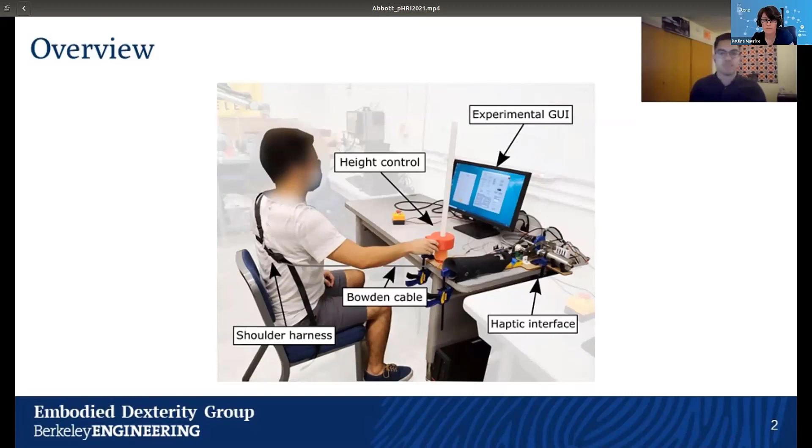Body-powered devices for grasp assistance. Through human subject testing performed using an experimental haptic testbed, we found that the addition of kinesthetic feedback led to improved grasp force control in a virtual grasp and lift task. By applying force to the user's contralateral shoulder related to the magnitude of applied forces in a virtual environment, participants applied lower and more consistent grasp forces using an upper limb prosthesis emulator. These results show the potential for such feedback to allow users finer control over their assistive devices.

Body-powered devices link the motion and force of a functional limb to that of some end effector through a passive cable system. While this cable can result in high loads applied to the user's body, it also enables the transmission of kinesthetic information back to the user regarding the state of the terminal device. This topology has been shown to exhibit superior feed-forward and feedback information rates when compared to other control mappings or user intent detection methods.

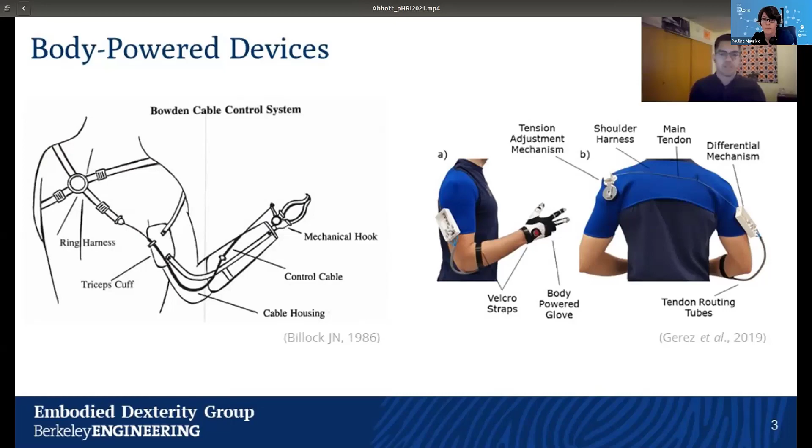This work examines the isolated role of this feedback on users' grasp force control in a study of body-powered prostheses. To do so, we designed a haptic testbed to emulate the operation of a body-powered prosthesis and allow for the systematic variation of force feedback presented to the user. In a virtual grasping environment, participants control the aperture of a gripper through motion of their shoulder, pushing and pulling on a harness and cable system, whose travel is measured as rotation of a motor shaft by an attached encoder.

Energizing the coils of this motor produces a force on the user's shoulder through the same harness. A custom cable transmission converts between the rotary motion of the motor and linear motion of the control cable, along with a tension sensor to control the output force feedback. Participants raise and lower the virtual gripper with a controller comprised of a 3D printed grip, Teflon tube, and an infrared distance sensor.

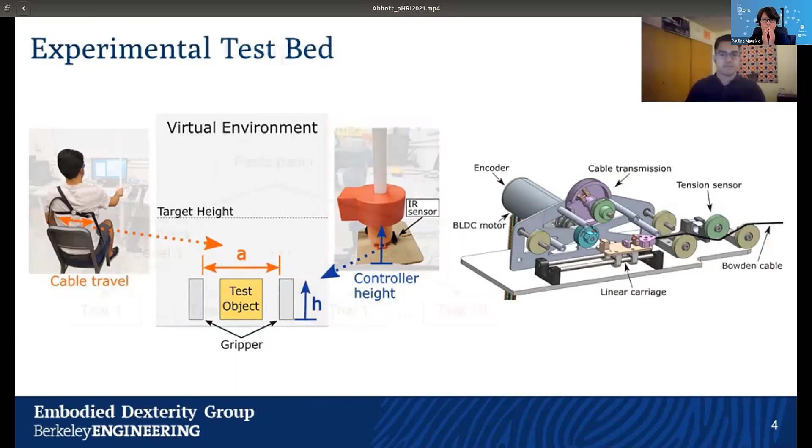For human subject testing, each participant experienced 5 separate feedback levels, ordered randomly, where the feedback level determines the scaling between virtual grasp forces and physical feedback forces. Participants performed 10 grasping trials at each feedback level, for a total of 50 trials per participant. The following analysis was performed on data collected from 9 participants.

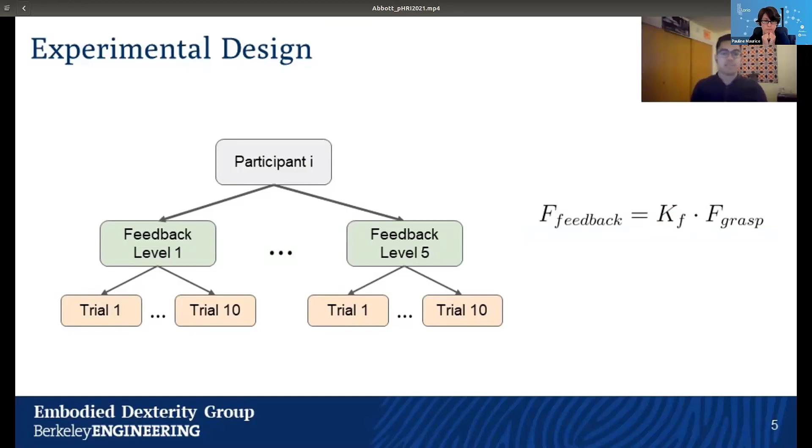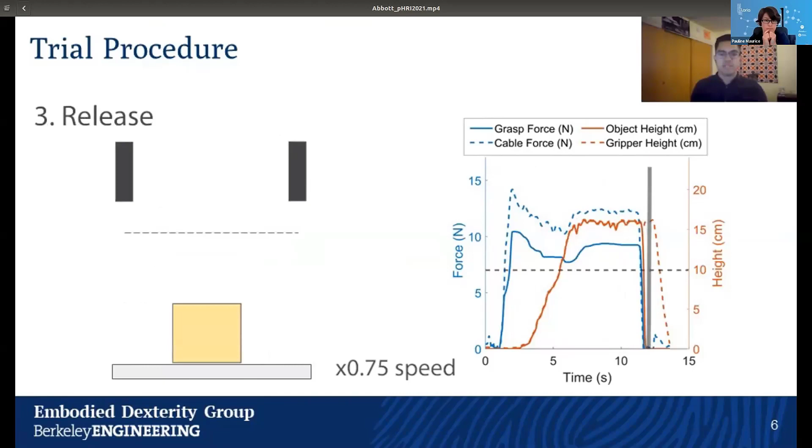Each grasping trial consisted of 3 stages. First, participants closed the grippers on the test object using the shoulder harness and grasped the object. Second, they lifted the object a minimum of 15 centimeters using the height controller and held the object for at least 5 seconds. Third, they released the object using the shoulder harness and let the object fall back to the ground level. In analyzing participant grasping behavior, we find that mean grasp force while holding the test object significantly decreased with increasing force feedback.

Participants applied less than half the force at the maximum feedback condition compared to the no feedback condition. Furthermore, the trend appears to be nonlinear with diminishing returns as the decrease in grasp force lessens between the higher levels of feedback. Similar trends, both in terms of shape and magnitude, are observed in analysis of peak grasp force as well as grasp force variation during the holding phase.

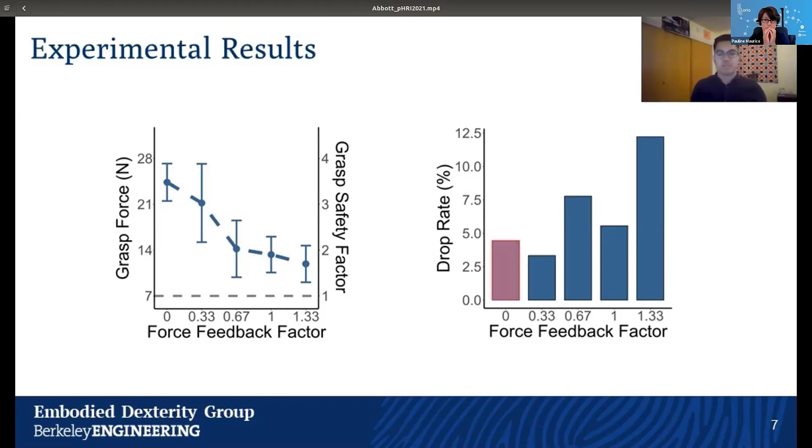However, participants also dropped the test object more frequently with higher levels of feedback, increasing from 4% at no feedback to 12% at maximum feedback. Taken together, these results demonstrate how the presence of force feedback can produce improved grasp force control in users.

The high loads exerted at high force feedback factors typically resulted in the best grasp performance, but also left users more prone to drops, as well as potentially exposing them to fatigue over long-term use. Additionally, the diminishing returns seen in the results also indicate that lower forces could produce comparable benefits to grasp performance in assistive devices without the added weight or space of more powerful actuators or higher reduction transmissions.

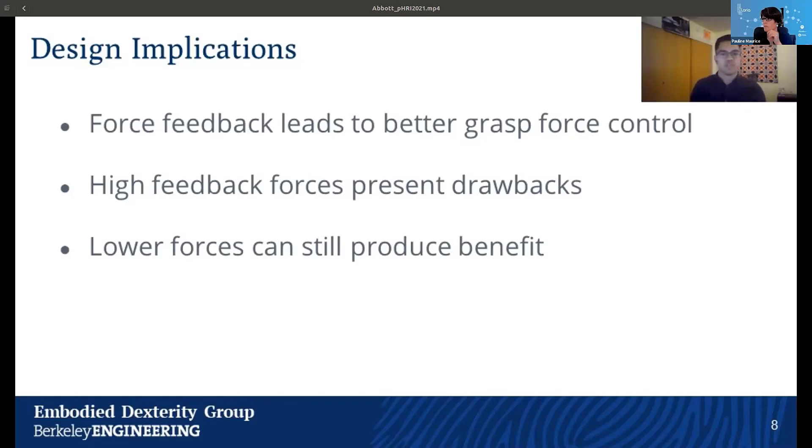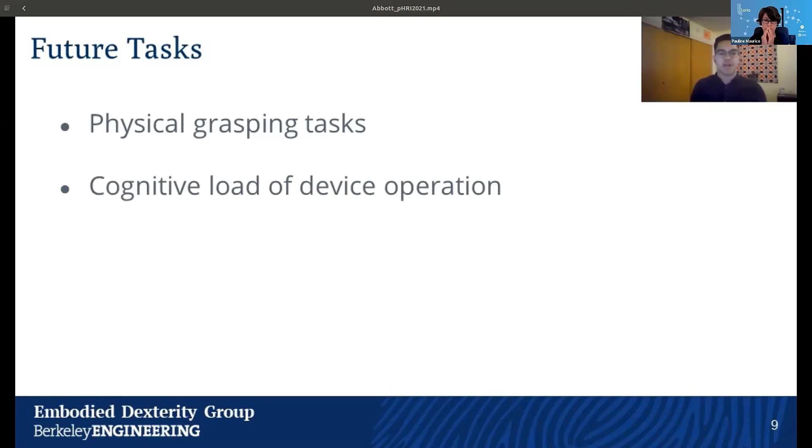We look to extend these findings through several potential paths. First, we aim to observe how kinesthetic feedback interacts with weight sensation in a physical grasping environment. Second, we will study the effect of kinesthetic feedback on the cognitive load placed on the user during device operation. Finally, we will investigate the integration of cable-based haptic interfaces into novel hybrid devices, which combine passive and active components, both for prosthetic technologies and those which work in parallel with intact limbs.

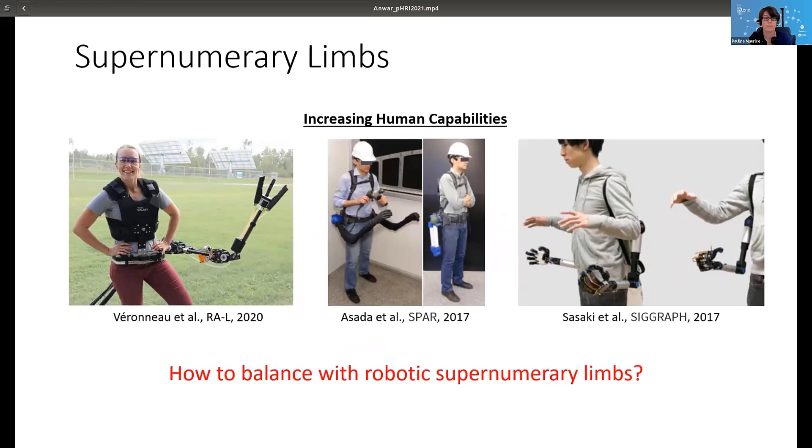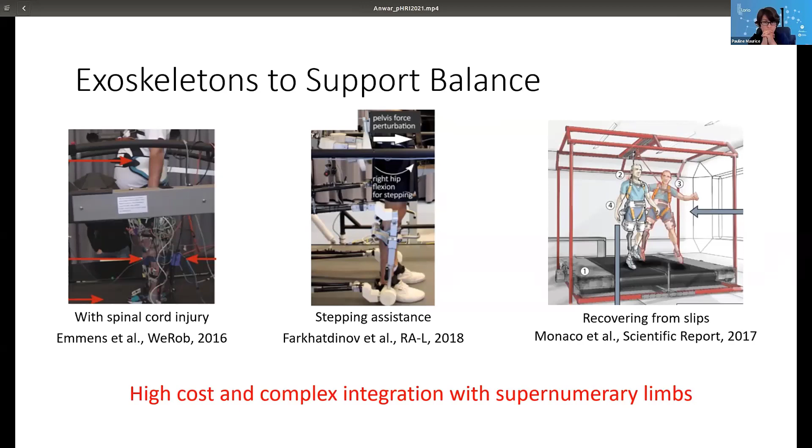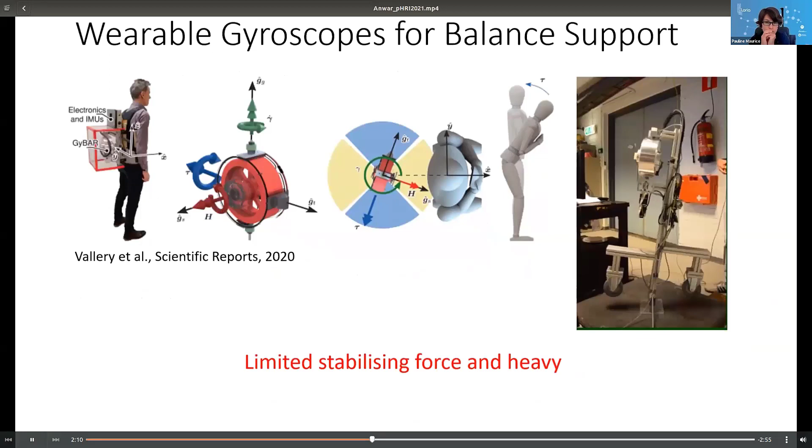Our goal is to use supernumerary limbs for material handling. We will make use of a robotic tail for balancing. We want to improve ergonomics and posture support for people using the system. Next, I'll talk about the simulation study that we conducted.

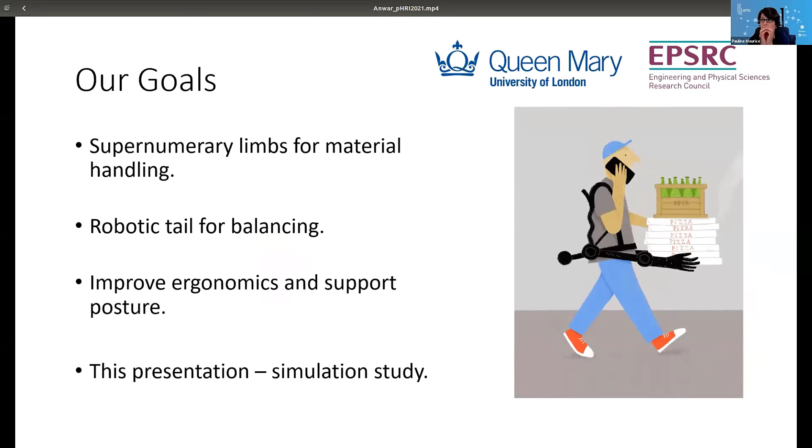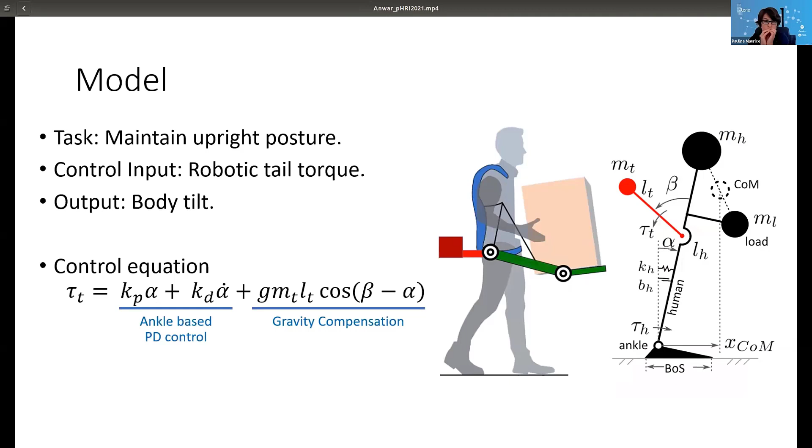We created a simulation model, and its task is to maintain upright posture. The control input is torque for the robotic tail, and the output is the anterior-posterior body sway. The human is modeled as a blue bar, and the load they're carrying is the orange box. The load is 10 kilograms, and its center of mass is 25 centimeters in front of the human center of mass. Due to gravity, when there's no stabilization, the human falls forwards, as shown in this video.

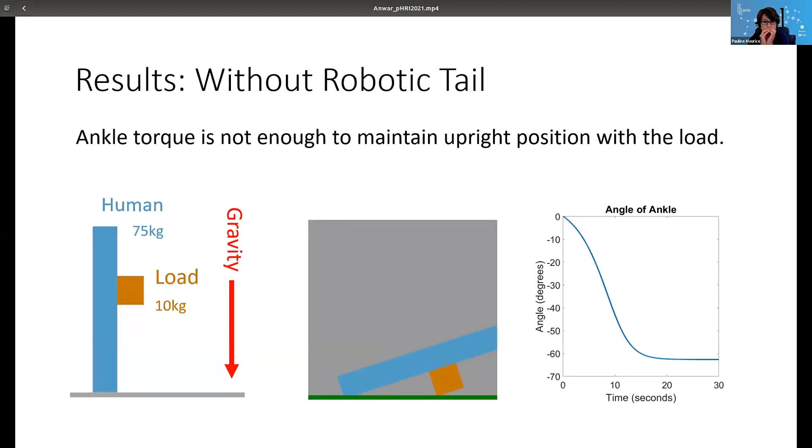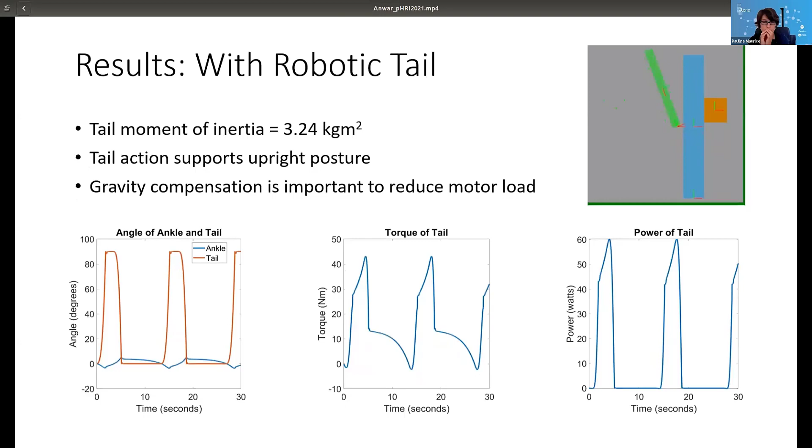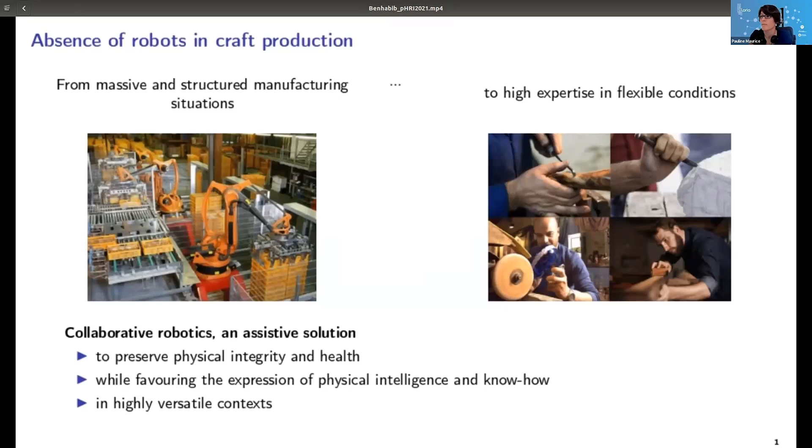Carpentry and the wood shaping task seems to bring together the problems mentioned. A wood shaper is a machining tool used to profile wooden parts. During the shaping process, the carpenter machines a piece of wood in strong interaction with a cutting tool.

However, the wood is a non-homogeneous and anisotropic material. This can lead to strong instantaneous variation of the cutting forces and destabilize the part throughout the task. This is characterized by a large variation in the workpiece velocity that the operator cannot compensate. According to our partners from the Carpentry Teaching Center, this is the origin of most tragic accidents in wood shaping and explains why many carpenters have lost phalanges.

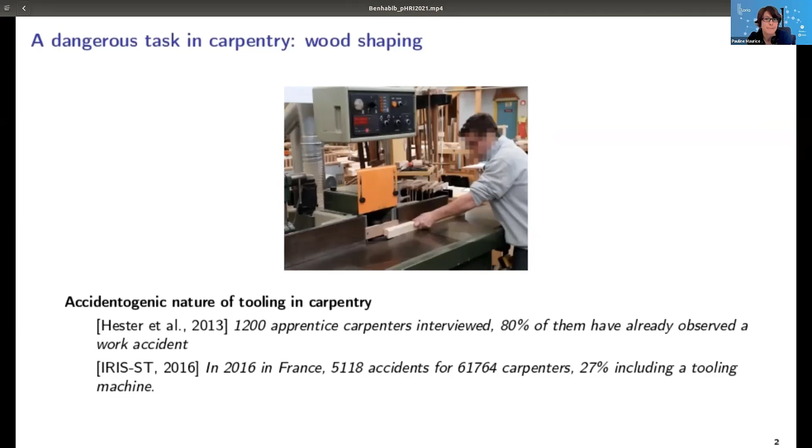In addition, wood shaping appears to be an arduous task given the posture adopted during the operation. Given the expertise required by wood shaping and its highly dangerous nature, we chose this task as a pilot to investigate the potential of collaborative robots in the craft context. The collaborative robot may be a good solution to stabilize the wooden part during tooling.

A proper approach to evaluate this hypothesis requires analyzing the various conditions of accidents and testing design choices, both in terms of robotic architectures and controllers. However, prototyping a direct solution in real conditions is dangerous and ethically complex. So, at first, it appears necessary to resort to a process simulator.

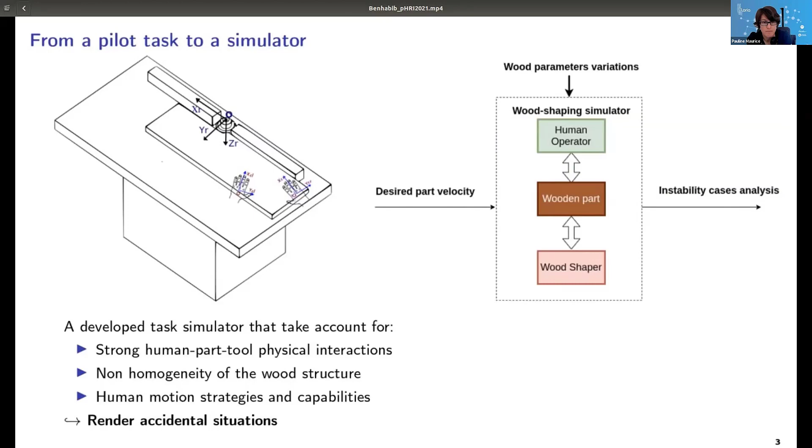To provide useful and meaningful information, we developed a physics-based simulator in order to reflect the wooden part dynamics as a function of its interactions with the tool and the operator. The simulator also allowed us to render the varying cutting conditions due to the non-homogeneity of the wood structure. Finally, it takes into account human action and its biomechanical limitations.

Given the nature of the fast velocity variation observed, a rather straightforward assistance strategy is proposed. The robotic assistance provided to the user should aim at decreasing the risk of sudden modification of the velocity while allowing the carpenter to maintain direct physical interaction with the wood, as well as his sensations.

To do so, we consider an assistance architecture where a collaborative robot is attached to the wooden part and applies appropriate wrenches to it in case of disturbance. To meet the specifications, it is proposed to use the robotic system in order to damp the transient velocity change when an instability occurs. The robot-controlled torque is thus computed to compensate gravity while applying a damping wrench.

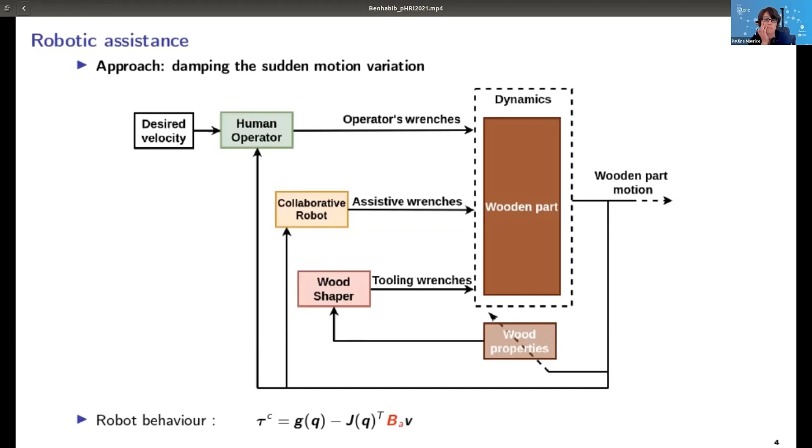The obtained results are now presented. In the proposed video, we illustrate the effect of the damping coefficient on the velocity peak when the disturbance occurs, both in simulation and experimentation. In the top left quadrant, we can see the subject performing the proposed experiment.

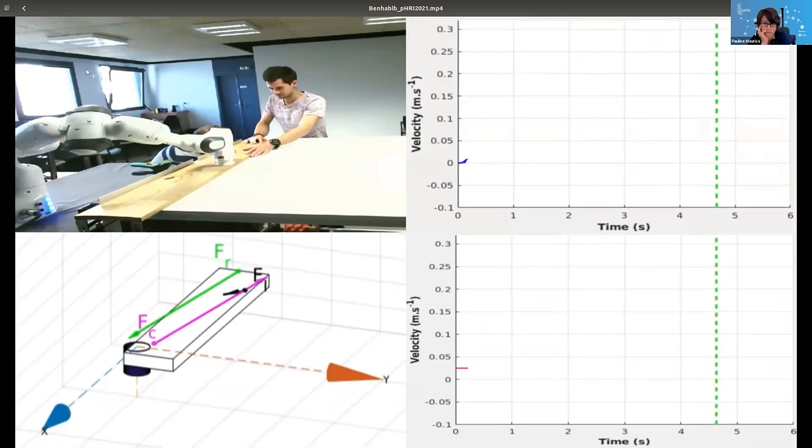In the quadrant below, a visualization of the corresponding simulated motion of the wooden part and associated interaction forces is proposed. The evolution of the velocity of the wooden part is shown on the right side. The top right quadrant corresponds to the experimental results, while the quadrant below corresponds to the simulated ones.

One can observe that the damping added by the robot provides an effective way of reducing the velocity peak, in terms of reduction of the forward motion of the hands induced by the wood disturbance. As expected, the larger the damping value, the more efficient the reduction of the peak velocity is. Very interestingly also, the simulated and experimental results are quantitatively very similar.

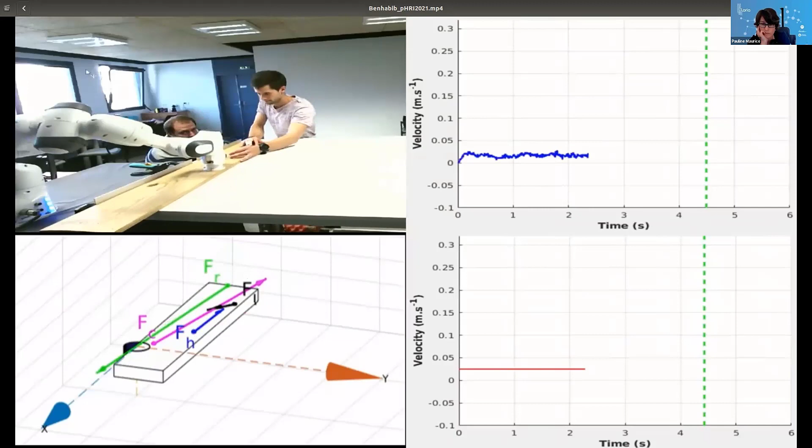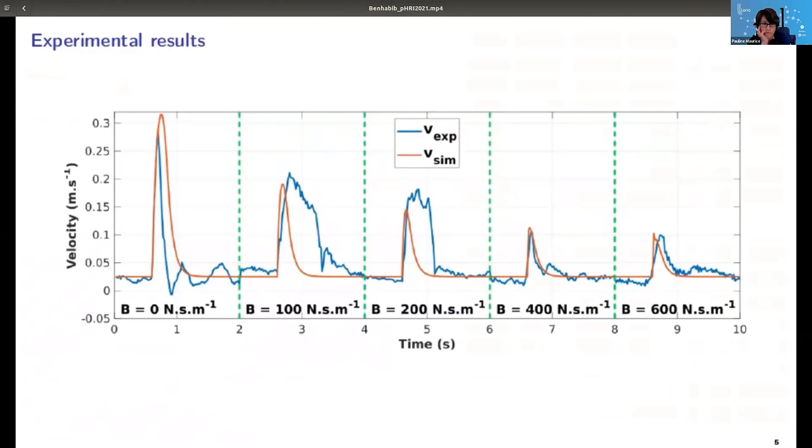In this video, I have presented our work, which is a first step towards a design methodology for the use of collaborative robots in the craft domain. Focusing on a wood shaping pilot task, we have developed a physics simulation of this process. This simulator allows us to predict the dynamic behavior of the wood part being milled as a function of the mechanical properties of the wood, but also accounting for the biomechanical capabilities of a simulated human operator.

The simulator appears to provide realistic estimates of the process behaviors and could be used in preliminary design phases to make choices in terms of robot architecture and control. However, the question of the trade-off between task safety, quality of execution, and operator comfort remains open. We believe that this issue can be addressed by adapting advanced control architectures to the expertise level of the operator. This then requires specifying and quantifying the operator's expectations in terms of sensory motor control on the task and its temporal evolution.

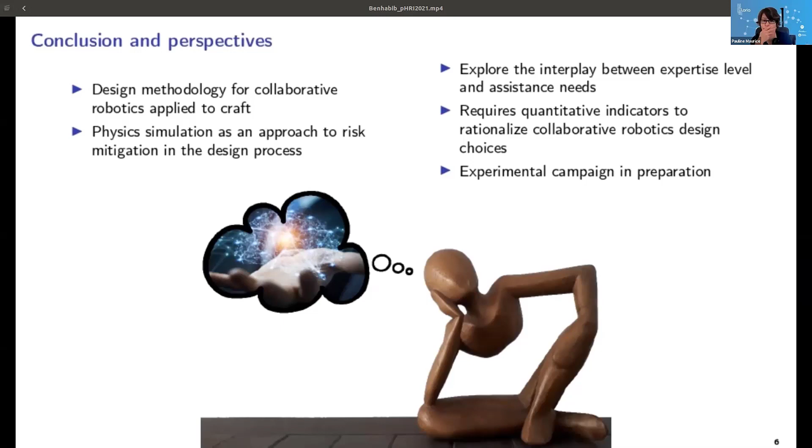Hello, my name is Thomas. I'm a PhD student from the University of Leuven in Belgium, and in this short video I will introduce the controller for a quasi-passive hip exoskeleton.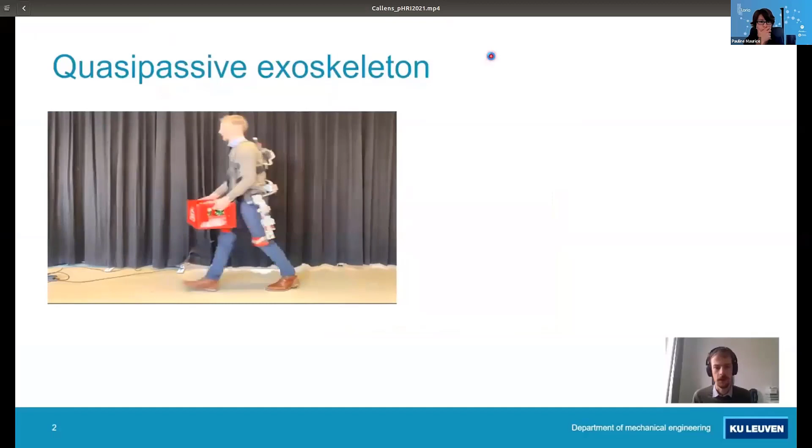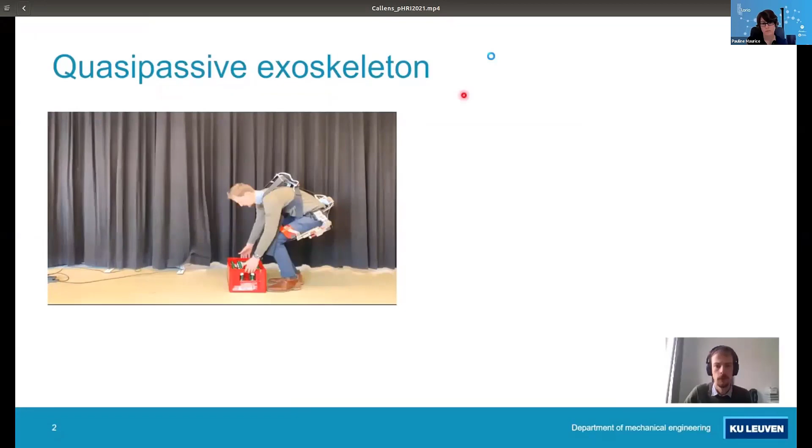Before introducing the controller itself, let's first take a look at the exoskeleton at hand, which has been developed by our colleagues from the University of Brussels. In the video on the left, I'm wearing the exoskeleton. The exoskeleton provides support whenever you're lifting objects from the ground. It contains two modules: a passive back module as well as a quasi-passive hip module. The quasi-passive hip module contains a parallel spring mechanism that can be coupled or decoupled.

In the figure on the right, we show the mechanism or solenoid responsible for the coupling or decoupling. As soon as the solenoid is engaged, a user will start to feel support when flexing forward. Apart from the solenoid, the exoskeleton also contains encoders, one located on each of the hip joints, such that we can register the hip flexion angles.

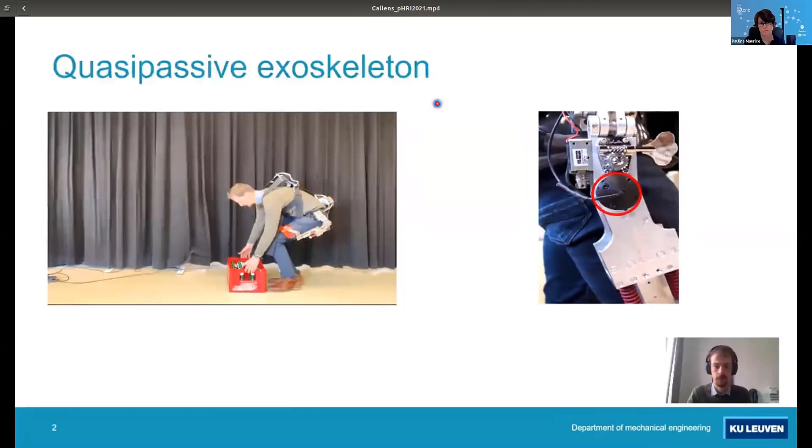The controller for this exoskeleton thus needs to decide whether to engage the support mechanism in the hips or do nothing. Our approach is to use higher order knowledge about the motions being executed, such that we can then make smart decisions on whether to engage the support mechanism or not. And we do this using decision theory.

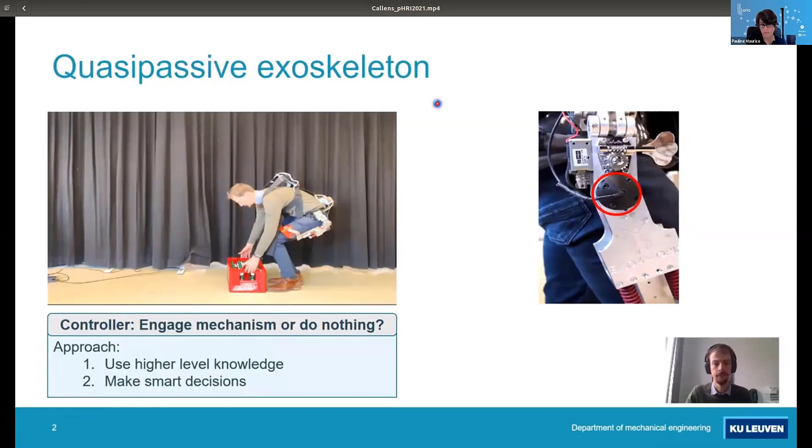To be able to use higher order knowledge about the motions being executed, the exoskeleton needs to have access to a database of known motions. To create this database, I've recorded myself while performing different types of motions, using the sensors on the exoskeleton to record myself. I've performed squat motions, asymmetric stoop left motions, and asymmetric stoop right motions.

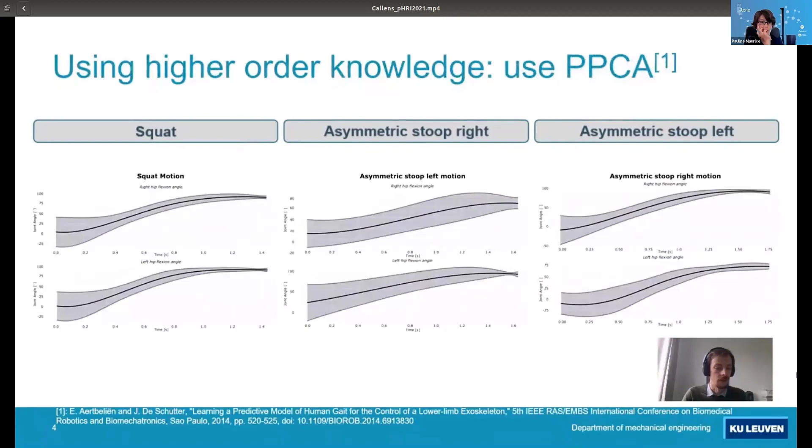Next, using a technique called PPCA, or probabilistic principal component analysis, I've transformed these demonstrations into motion models. The black line in the figures is the mean of the demonstrations, while the gray area indicates the variance in the demonstrations. The exoskeleton then uses these motion models in the database to detect ongoing motions, as well as calculate the probability of ongoing motions.

Once the exoskeleton has recognized the motion, it now needs to make a decision about whether to engage the support mechanism or not. To do this, we use decision theory. This means that we will first think of the actions that the controller can make, as well as the outcomes or situations that we can end up with.

The first action that the controller can do is to engage the support mechanism. There are two possible situations that we can end up in. The first situation is the one in which the user is getting the support that he or she wants—this is a positive situation. The second outcome is the one in which the user did not want support but is getting it anyway. In this situation, the exoskeleton is hindering the user.

To both of these situations, we now assign a utility or usefulness score. The green one is a positive score for a positive situation; the red one is a negative score for a negative situation. Similar reasoning has to be done for all the actions that the controller can do. In this situation, there is only one other action that our controller can do, which is doing nothing.

Then for each of these actions, we can calculate the expected utility. The expected utility starts from the utility scores for all the situations and weighs them with the probability of ending up in such a situation. These probabilities follow from the motion models that we have introduced earlier. The controller will now take the action that maximizes the expected utility, such that we always do best for our user.

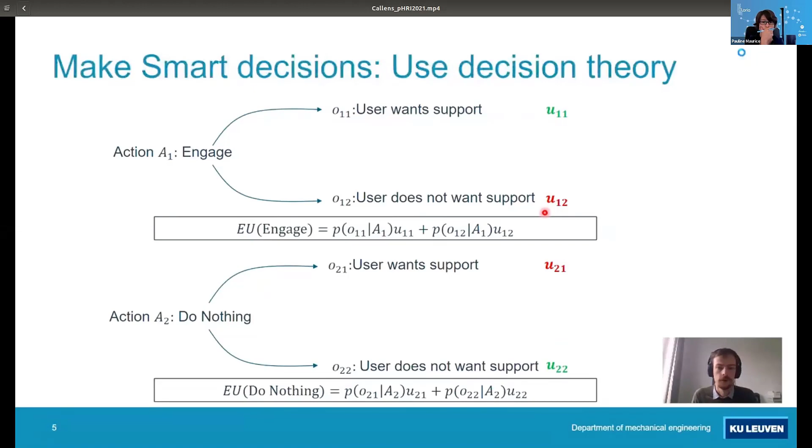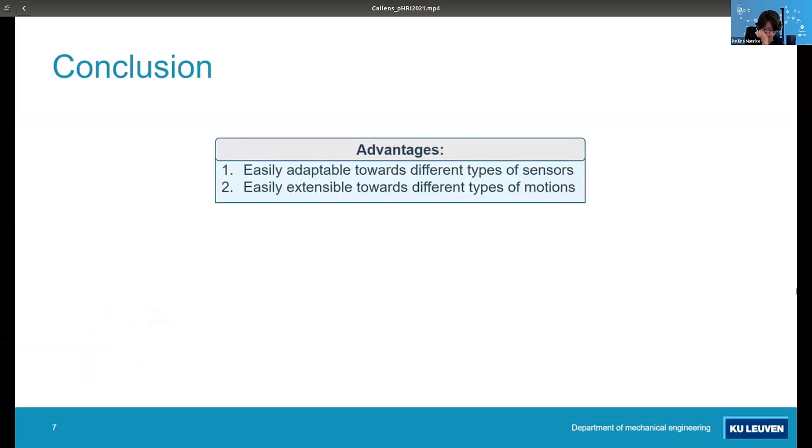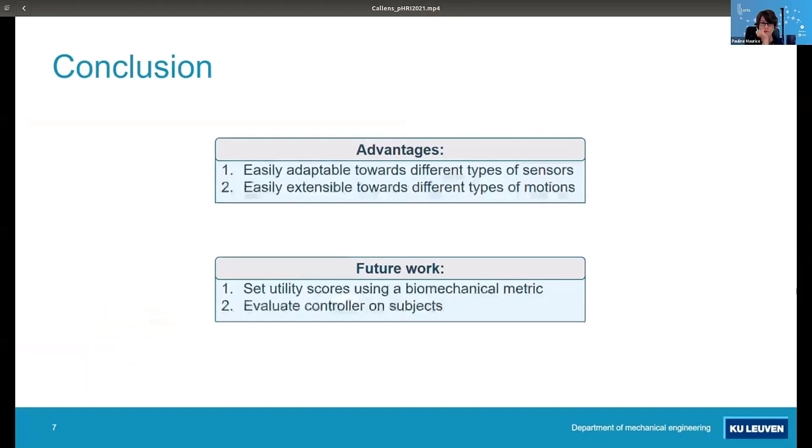The advantage of this approach is that it's easily adaptable towards different types of sensors, as well as easily extensible towards different types of motions. In future work, I will try to set the utility scores of the different outcomes using a biomechanical metric, and I'll also try to evaluate the controller on subjects. Thank you for your attention.

Working in a not suitable posture may cause many problems like work-related musculoskeletal disorders, the single largest category of work-related injuries, responsible for 30% of all workers' compensation costs. One way of improving workers' physical health and promoting industrial productivity is to do the job in the most ergonomic way possible.

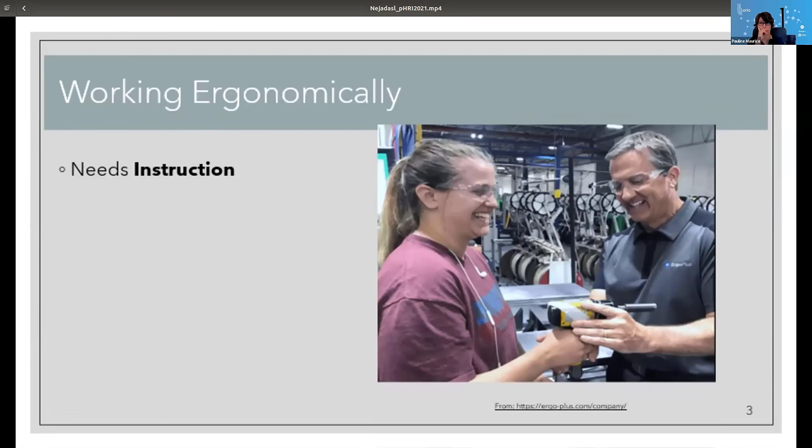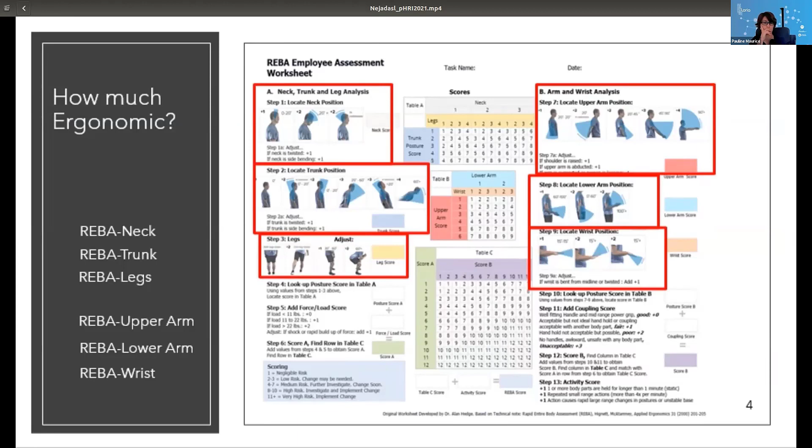In some cases it needs instruction, especially in industrial environments. Consider working - there is a systematic way that can quantitate the ergonomic state of the employee, the REBA assessment method, which assesses the worker's ergonomic situation in 6 steps and ensures that the joint degrees of neck, trunk, leg, upper arm, lower arm, and wrist are calculated. Finally, by using some tables, the final REBA score is obtained.

The main idea was first to give customized instruction to the user by a user interface, to remind the worker about its current posture and the most optimized posture that can be obtained.

As stated earlier, each posture has a REBA score, and each REBA score consists of a REBA array that holds the REBA score of each joint. There is an equivalent array of joint degrees holding the angle interval based on the REBA score. For example, for the neck, a joint angle between 20 and 60 has a REBA score of 2.

The optimization algorithm is based on getting the current posture joint degree and computing the REBA score. In case it's greater than a threshold, we're going to reduce it. But the question is how much reduction is possible.

First, consider the person's REBA score is 5, as an example. Reduce it by 1 unit - faced with many combinations of segment REBA scores that all result in a reduced REBA score of 4, and according to the REBA assessment method, they are ergonomically at the same degree. Choose one of these combinations and continue with that, proposed to the user.

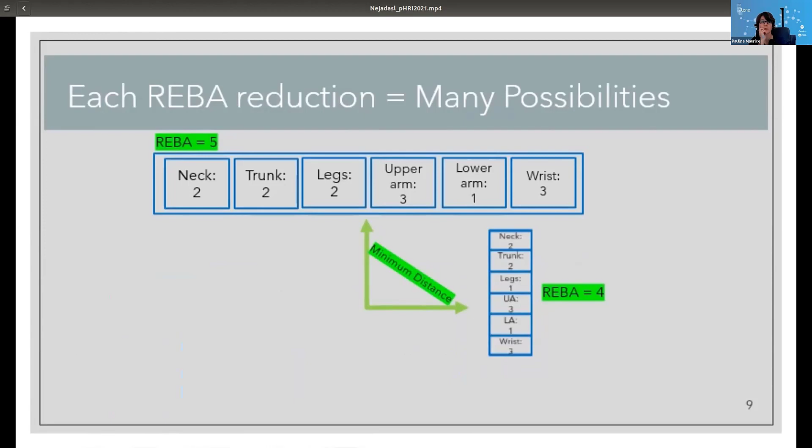We choose the one which has the minimum distance to the current posture, and the feasibility of this decision will be checked.

To check the feasibility, we should know that each selected REBA array specifies the human joints - the wrist, elbow - that the human joint should move within this new constraint. This will result in a new movement limitation to the user. The question that arises here is, can the person also continue to do the job under these new constraints or not?

So to choose, select, and check the feasibility of the selected decision, we go for the inverse kinematic FABRIK. FABRIK is a forward and backward reaching inverse kinematic, and it solves for a target position - in these new joint constraints, it can determine whether the target can be reached or not.

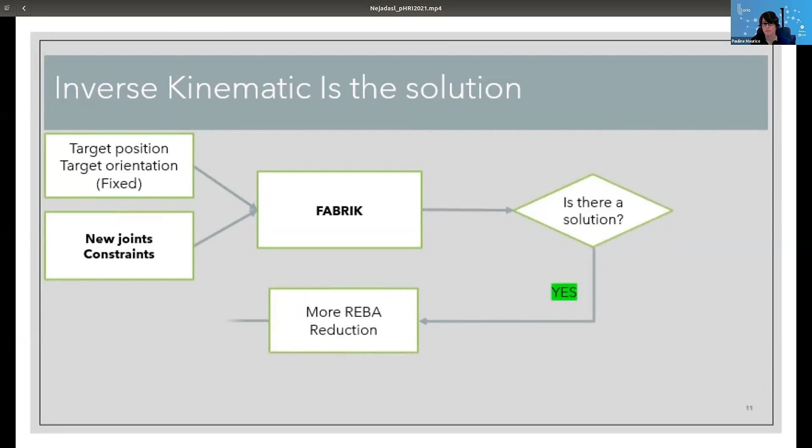FABRIK is computationally very fast and can solve the problem at the lowest computational cost; it is a novel heuristic method. The result is a library in Python which can solve the optimization and propose the best possible ergonomic posture that the user can use. The results are also shown in a 3D Max model, and the code is available on GitHub.

All right, so it seemed that the last video ended a little before the end, but I think it's just the video as I added it. Yeah.